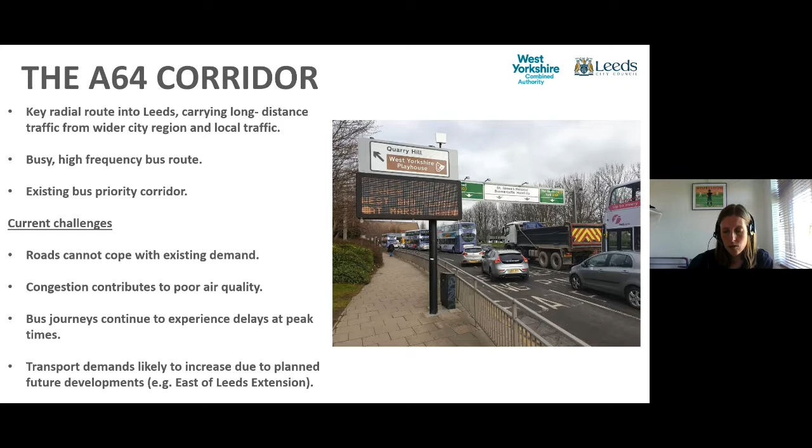There's a number of challenges faced along this corridor around current congestion problems affecting bus journey times and reliability. These delays are likely to get worse along the corridor due to planned housing growth as part of the East Leeds extension. The next slide sets out the scheme aims to address some of the challenges that have been identified through a number of interventions for buses, such as priority at key junctions and improved facilities for those that walk and cycle.

Our scheme aims to improve bus journey reliability and journey times, improve accessibility and safety along the route, reduce congestion and improve air quality, encourage modal shift from private car to more sustainable modes, encourage healthier and more environmentally friendly methods of travel, and help achieve the council's commitment to be net zero carbon by 2030.

So I'll pass on to Simon Linley at the Combined Authority to present the next slide.

Good evening, everyone. I'm Simon Linley, a programme manager from the West Yorkshire Combined Authority, working on the Transforming Cities Fund programme. Fundamentally, in terms of the Combined Authority, we're developing a 21st century transport system essential to the West Yorkshire Combined Authority's vision of building a strong, successful, zero carbon economy that provides a great quality of life for everyone who lives and works in the region.

Providing accessible, attractive and a cleaner alternative to car journeys is at the heart of the Leeds City Region's Transforming Cities Fund, a programme of transport infrastructure investment secured as part of the West Yorkshire Devolution Deal. The programme, delivered by the Combined Authority, is in partnership with local authorities, including Leeds, and is being funded through £317 million from the Department for Transport, plus local match funding of up to £140 million.

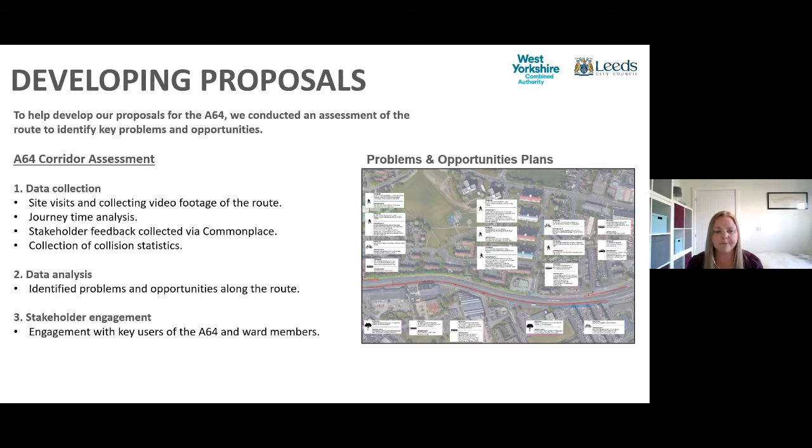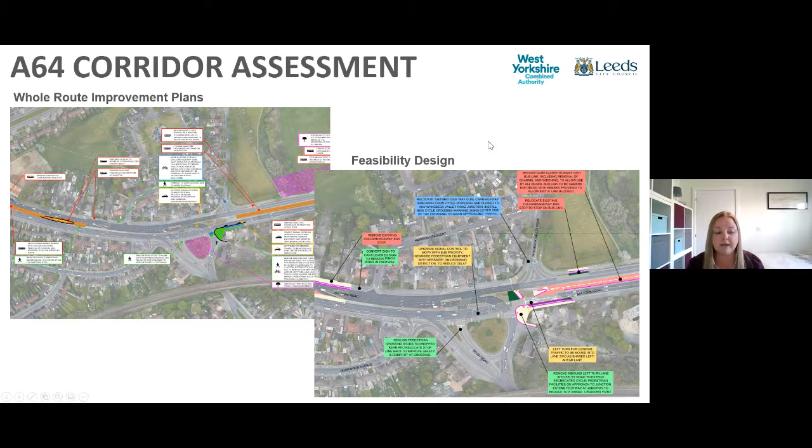From the problems and opportunities, we produced whole route improvement plans. These plans show all the interventions that are viable across the scheme, based on location and affordability. From these whole route improvement plans, we then sifted these improvements down into the feasibility designs, which are shown in the virtual consultation room. The feasibility designs take it a step further and show the interventions fully. Some interventions haven't made it through to the feasibility design stage, based on whether they meet the objectives of the scheme and provide the required benefits.

I'm going to take you through some of the proposals in a minute, but as an overview, this is the length of the scheme, shown on 18 sheets with boxes. Each of the colours refers to a different section, and when you go onto the virtual consultation room, you can answer specific questions related to those sections. You can also see all 18 plans on the virtual consultation room in full detail.

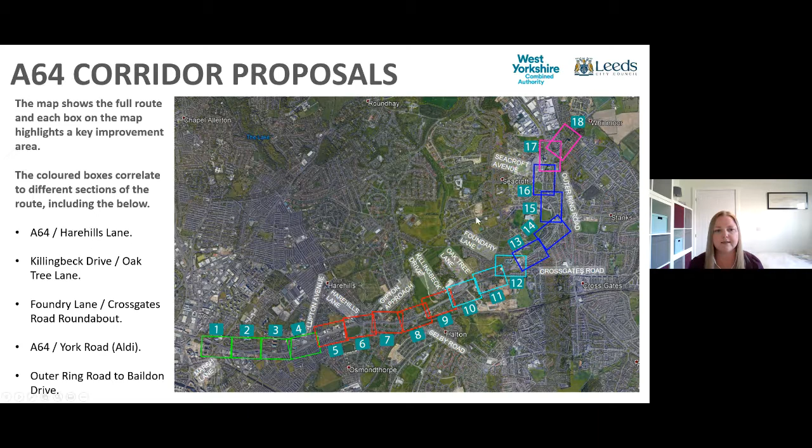I'm just going to take you through some of the significant parts of the scheme and some of the big improvements across it. The first one is the bus link. There is an existing guided busway across the corridor, with a one-way section running from the approach to Harehills Lane through to Selby Road, outbound from Leeds. Then there's a small two-way section between Selby Road and Killingbeck Drive, in both directions, inbound and outbound. The scheme proposes to convert this guided busway into a bus link, which will include removal of the channel that gives it the guided element, and widening it to make it more accessible to all buses.

As part of this, we've also recognised that we don't want buses to get stuck behind buses at bus stops, or stuck if a bus breaks down. So we are providing bus bypasses past the bus stops in the link, allowing buses that aren't stopping to bypass buses that are stopped. There will also be breaks in the segregation to allow buses to get back into the main carriageway if another bus breaks down in front of it.

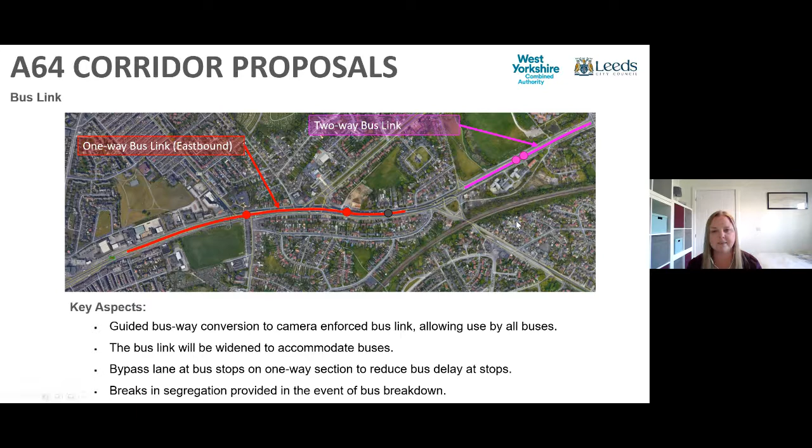So in terms of the interventions at the Harehills Lane A64 junction, for bus priority, buses travelling outbound will be expected to use the new bus link, and we will be providing a new bus gate inbound. This bus gate will ensure buses are at the front of the queue as they travel inbound towards the city centre. We'll also be improving the whole junction and the traffic signal control.

As part of that, we will also be removing the existing pedestrian footbridge, and in order to make that happen, we're going to provide segregated pedestrian and cycle crossings across the whole junction, on all arms.

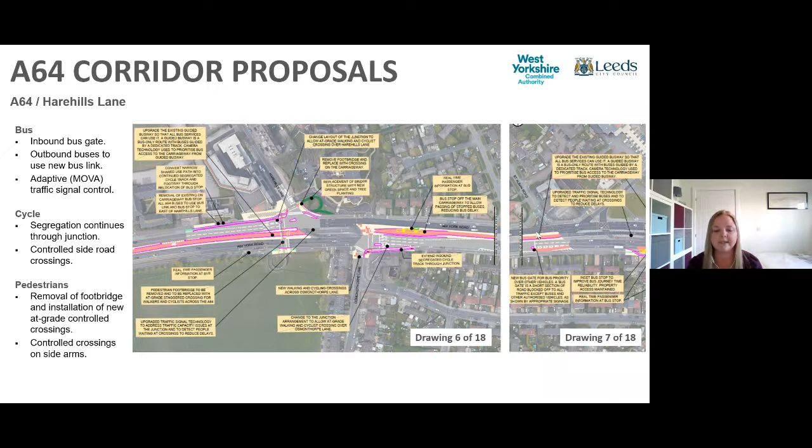So we're now going to have a look at the Killingbeck Drive, Oak Tree Lane area. In terms of bus priority between the Killingbeck Drive junction off the A64 and the Foundry Lane Crossgates Road roundabout junction, there will be limited physical bus priority in these sections, due to the constraints of the network.

So in order to provide bus priority across these sections, we'll be looking to gate traffic and provide priority to buses at Killingbeck Drive going outbound. Buses will be gated on approach to Killingbeck Drive and given priority over general traffic. We'll also be improving the traffic signal control, to give benefits to all traffic. There will be changes to the Killingbeck Drive layout to improve crossing facilities for both pedestrians and cyclists, reducing the number of crossings needed to get across Killingbeck Drive, improving journey time and quality.

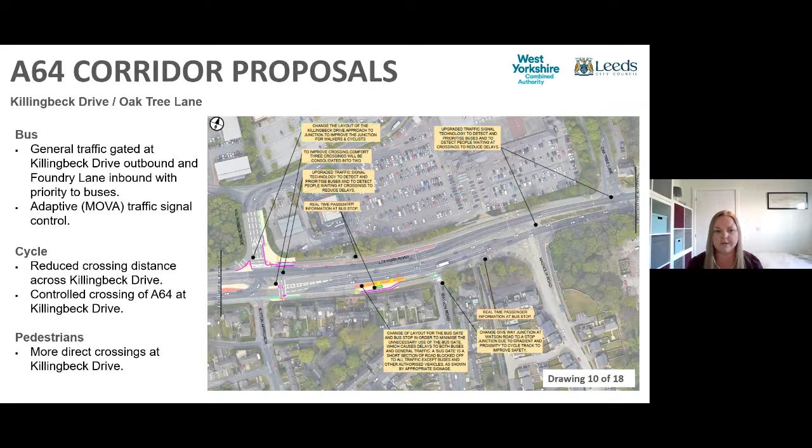As I mentioned, between Foundry Lane Crossgates roundabout and Killingbeck Drive, there is limited potential for physical bus priority. Therefore, we will be introducing a new bus gate at this junction on the A64, outside of the current roundabout. This bus gate will also have a bus lane on approach, to ensure buses can get past any queuing traffic waiting at the bus gate. This will give buses priority across the section through to Killingbeck Drive, where the physical bus priority picks up again.

Again, this junction will be improved, with better traffic signal control. For cyclists, we are looking to provide more off-carriageway cycle facilities between Somerville Green and Foundry Lane, to enhance the current scheme already on the ground for cycling in this area.

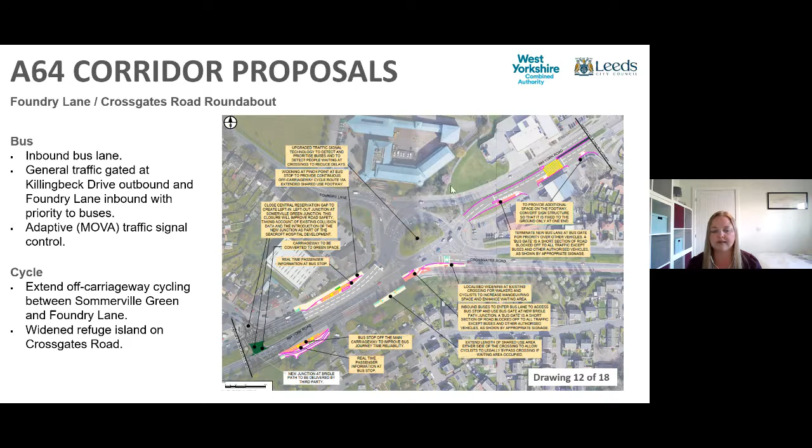At the A64 York Road junction, this is currently a priority control junction, and the proposals look to signalise this junction and provide better traffic signal control. The reason for doing this is that buses coming out of York Road onto the A64 to go into the city currently struggle to get out and can get stuck in the middle. So it's predominantly to improve safety and the reliability of bus journey times getting out onto the A64.

In order to put this signalised junction in, we are going to have to close the access to Inglewood Drive from the York Road area. However, we have looked at putting in a new access from the A64 directly. As part of this proposal, new signalised crossings for both pedestrians and cyclists can be installed across York Road, improving pedestrian and cyclist journey times and the quality of their journey along this link.

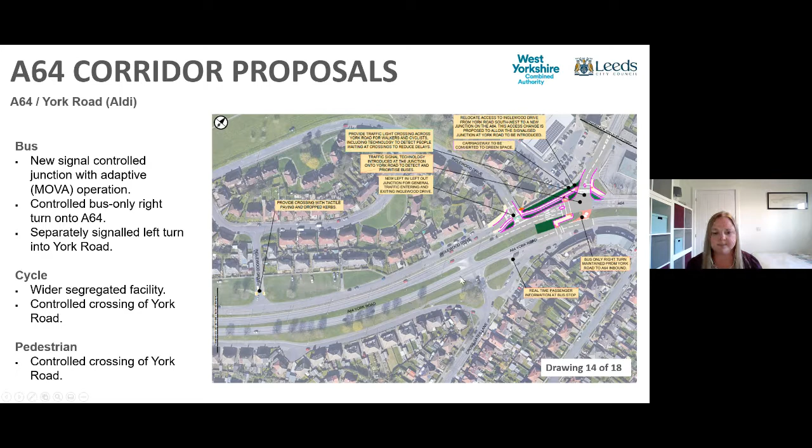Looking now at the outer ring road, outside towards Baildon Drive, this section of York Road has a number of different proposals. Firstly, we'd be looking at introducing an inbound bus lane on approach to the outer ring road, to try and get buses across onto York Road near Seacroft and then down onto the main A64 corridor.

For cyclists, the proposal is to include a new segregated cycle lane outbound from the outer ring road, connecting to current facilities and going all the way to Baildon Drive, linking into new and existing cycle facilities there to help plug a gap in the cycle facilities in this area. Similarly inbound, from Baildon Drive to the outer ring road, these proposals will include some segregated cycling and also off-road or quiet ways cycling along some of the side roads rather than the main corridor.

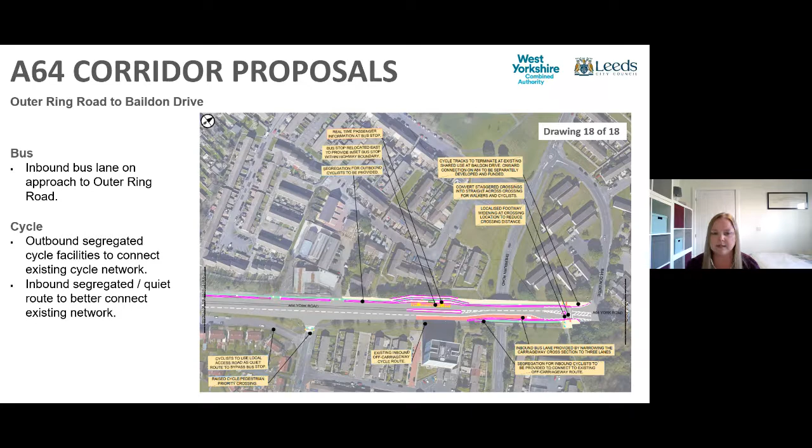As part of the scheme, we've also looked at a potential new park and ride site, near Winmore Grange - the dot on the screen shows the location we're looking at. We're in the early stages of development here. The site is currently being selected based on potential demand, access requirements, and lots of other environmental factors we've looked at. We are looking at proposals for this site at the moment, and there'll be more information on this to come.

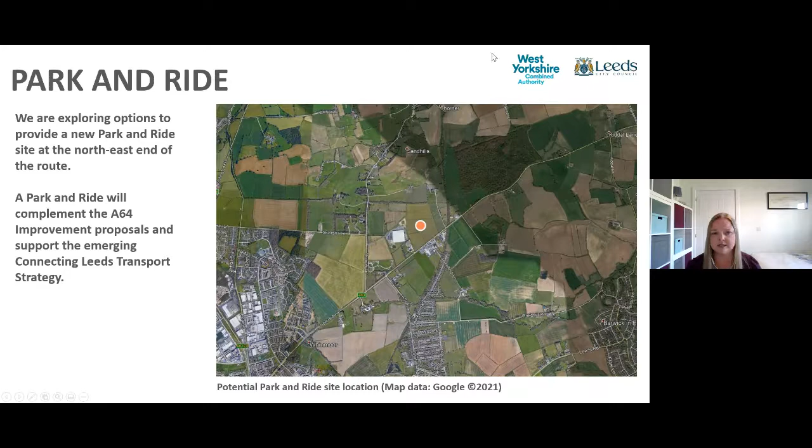I'll now pass over to Liz, who'll take you through the next steps.

So the next slide outlines what the next steps for this scheme will be, and how the input from the public consultation will be used to inform the development of the scheme proposals. The consultation was launched on the 21st of June and runs for 5 weeks online until the 25th of July this year. Following further feedback, we will review the designs and then submit to the Combined Authority in September 2021 for their approvals process.

Further separate consultation will follow on the park and ride element in autumn/winter 2021, and a further approval process will follow from the Combined Authority on the park and ride element in spring/summer 22. The construction period for the corridor element is due for winter 2022 to summer 2023, and there will be further opportunities to input into the designs and further consultation opportunities as the scheme develops, also for the park and ride element as part of the planning process.

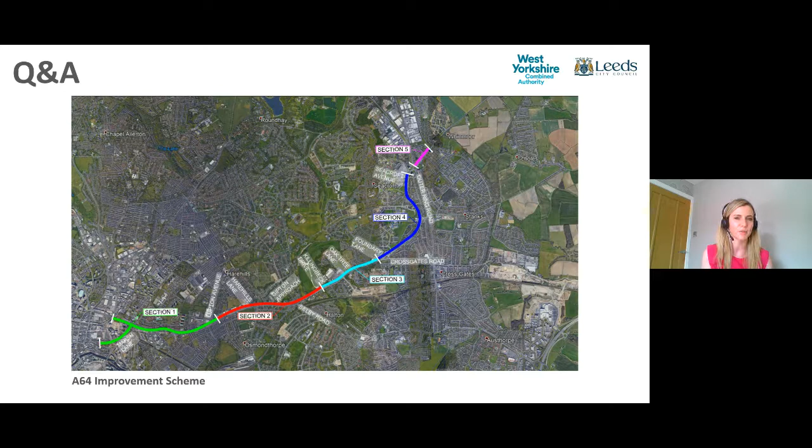So as I say, there's still quite a lot of work to do. We're in the very early stages, but we're just keen to get some initial feedback on that appetite for a park and ride on the A64.

Okay, thanks, Rebecca. Just to reiterate that we will be doing further consultations on that later on in the year.

Another question, quite a lengthy one, so bear with me while I read it out. Why don't you just flatten it and have a 6-lane road with no central reservation and have dynamic signs similar to what's on the A38M in Birmingham? So you have 4 lanes at peak journeys and 2 lanes in the opposite direction, and this will add more resilience as you can set lane 1 bus only, lane 2 HOV, motorbikes, etc.

So I think Lauren and Nick are going to probably answer this between you. Thank you, yeah, I'll start.

Predominantly the reason this isn't an option is due to cost. It was one of the options we looked at originally, but it's been sifted out, and that's based predominantly on the budget for the scheme. There are also some safety concerns. There's a lot of pedestrians in this area, a lot of cyclists as well, so it's not particularly a motorway. We have to consider the safety of cyclists and pedestrians when they're crossing the road, as it's much more of a city centre location and not specifically a motorway.

Okay, thanks, Lauren. Is there anything additional to add to that? I think Nick, did you want to add anything? No, I think Lauren's really answered the question. It is primarily down to the funding, but we did think about it. There is that safety angle. The A38 scheme's been in a little while, and you've probably all seen in the press the debates around smart motorways and starting to use technology. I think there's definitely a spotlight on using the highway that way, but primarily it is down to the funding that Lauren has already covered.

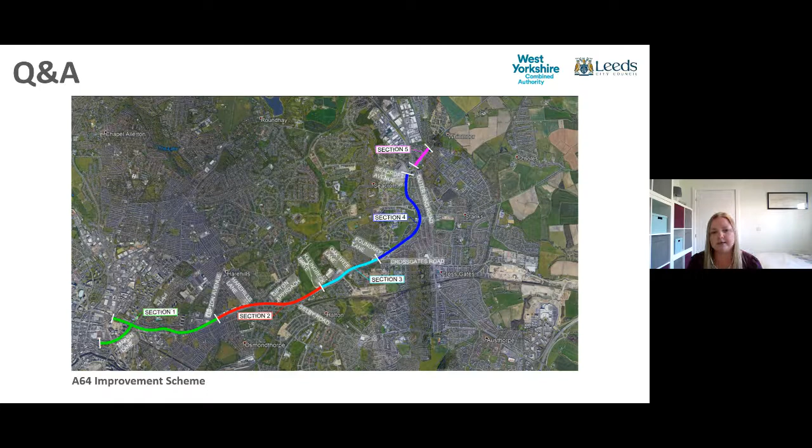Will the scheme include the planting of trees and other green improvements? The scheme does include some green improvements, predominantly in the areas where we are making changes, not in areas along the corridor where we're not making changes. The bigger green improvements will come when we look at the park and ride site in more detail.

Another question just coming in: will there be a pedestrian crossing from Stockheld Lane to the park and ride site? This goes into detail about the park and ride again. I can take it and roll it up into one answer. Going back to the presentation, the park and ride is on a slightly different programme to the corridor, so there's no certainty around the design yet.

However, the work has started, and we are looking at whether there's a need for pedestrian crossings across the A64, accesses to businesses, and how best to provide access to the park and ride site to service park and ride buses and service buses. There's an array of factors we've got to take into account, but pedestrians are definitely high up on the agenda.

One more question, and it's another park and ride one: what local road improvements will be made around the new park and ride site? Nick, I think this is for you. Yeah, that might be similar to the previous question.

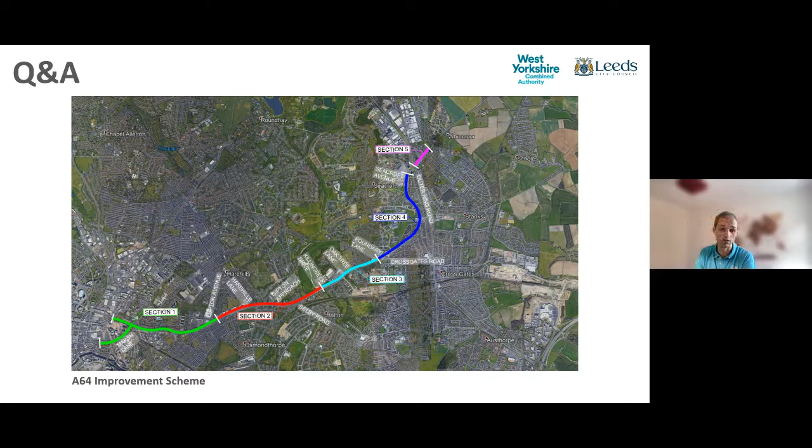We're very much at the early stages on the park and ride site. We've got the preferred option, but it's primarily going to be focused on providing access into the park and ride site. We're mindful of the potential need for improvements to access businesses along the same section of the A64, and again, going back to the need for pedestrian crossings, tied into the bus stops already present in that area.

Okay, that's great. I don't think there's any more questions coming in for a moment.